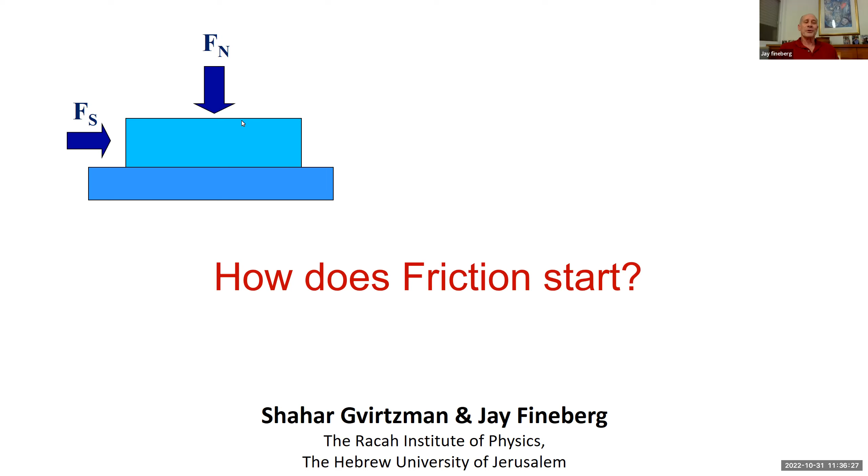And the person that actually did all the work is my graduate student, Shahar Gvirtzman. So anyone that's heard me talk about this stuff in the past few years has seen the same picture, but it's two blocks pushing against one another, and we're interested in this problem of an earthquake. But what we're really studying is this problem: how the interface that separates two elastic, rather smooth but still rough blocks, how it separates, how we break the contacts along this interface.

Over the past few years, we've done a bit of work showing that, at least in our experiments, the process of breaking this plane of contacts is by way of cracks. So you have ruptures or earthquake-like things that are moving in either direction, and as they move, they break the contacts until they finally break the whole line of contacts, and we get macroscopic motion.

So we know a lot about cracks, and our group, as well as quite a few others now, have seen such things. So now we're switching gears and asking about how the cracks form in the first place, and that's the nucleation problem. We'll be looking at how we start the initial cracks that then propagate and have earthquake-like behavior. See, I'm trying to be very politically correct here, Chris.

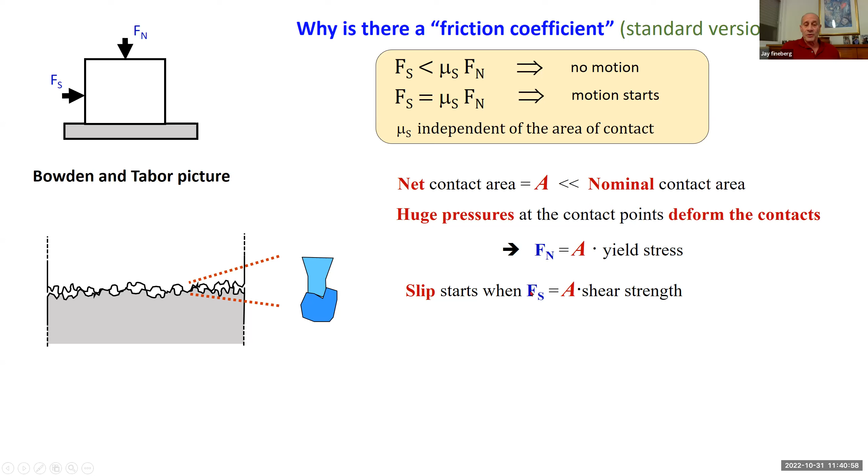Slip starts when the shear force equals the real area of contact times the shear strength. Putting these together, we get the static friction coefficient, and an explanation for why it's roughly order 1, because it's basically the shear strength divided by the yield strength of the material. Now, I don't have a problem with this.

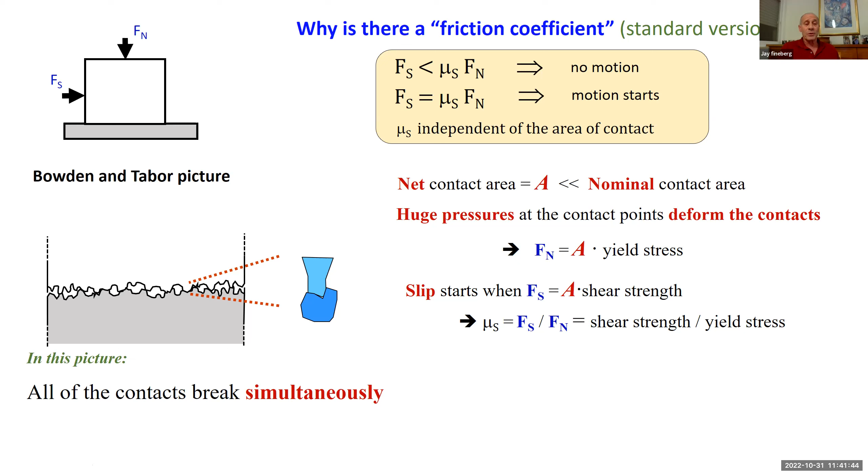In fact, I don't have a problem with anything here except how this contact area breaks. This picture tacitly assumes all the contacts are broken exactly at the same time, simultaneously. But that's not really how things break. In general, materials break because cracks propagate through them, so the fracture process doesn't break all these contacts at once, but sends an earthquake-like front through the material, and that's responsible for breaking it.

This has a lot of ramifications on the friction coefficient, on the whole friction process. As we'll show, one result is that the static friction coefficient of any given material isn't a characteristic property of the material, but depends on the small details of how these materials are placed together.

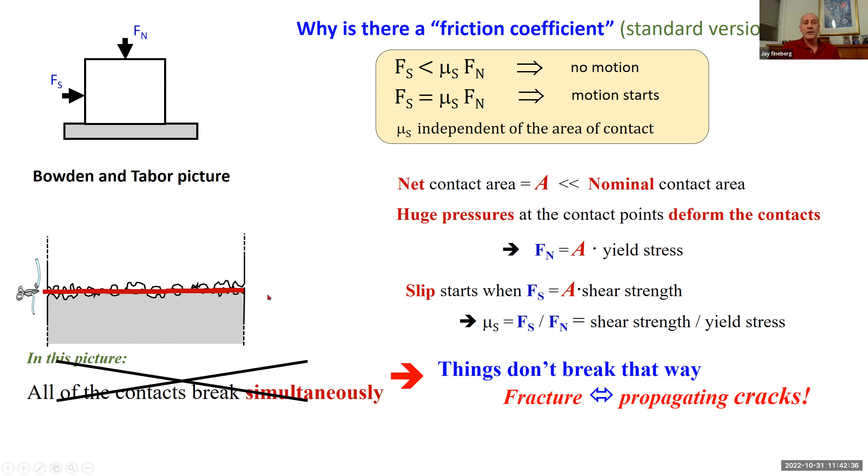So the onset of friction in this picture is basically the question of how, when, or why cracks propagate. Things break because cracks propagate through them. That's a general statement, and the reason is—I apologize if I'm repeating stuff you all know—any crack, however small, will focus stress at its tip.

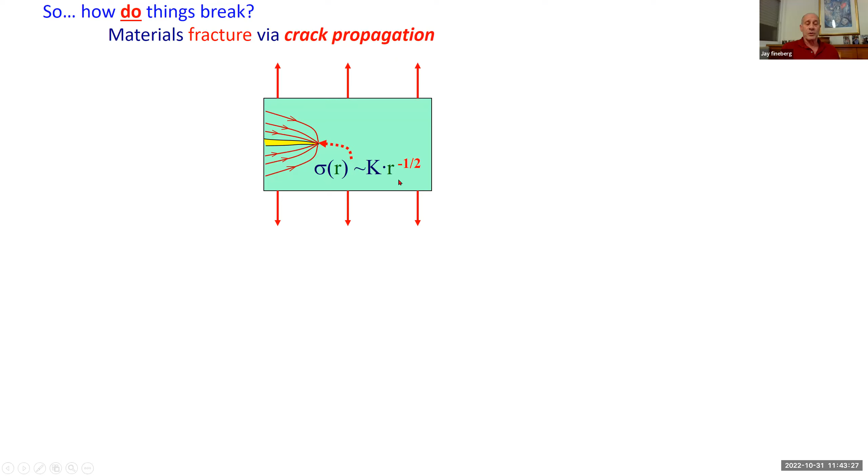That stress approaches a mathematical singularity. The stress field at the tip of a crack—here I'm showing tensile cracks, but it's the same for shear cracks—scales as 1 over the length r from the crack, to the power of 1/2. So as r goes to 0, the stresses become infinite. The claim, which I'll back up with data, is that the slip of interfaces, or frictional motion, is actually caused or mediated by shear cracks, called in the jargon mode 2 cracks.

Jay: can I ask a clarification? Sure. Which is the origin of the singularity? Is it because we are using elasticity everywhere except at the tip? Is the singularity a real physical feature, or a feature derived from our assumptions?

It's a mathematical feature if you assume elasticity everywhere and a stress-free back of the crack where we relieve the stresses. In frictional cracks, we haven't relieved all the stresses—there's a residual stress in back of the crack. But if this residual stress is more or less constant, because we're looking at a linear system, we can subtract it away. So we're actually solving the same problem as for a stress-free crack in the back.

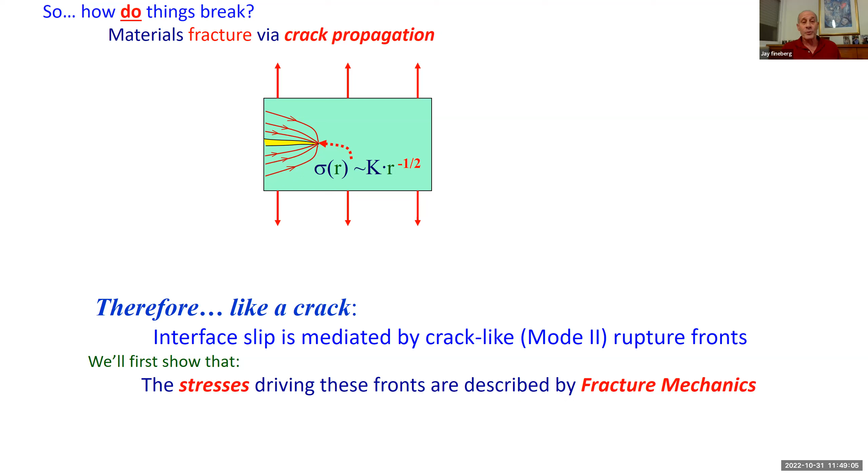Because often these questions are more important than what I wanted to get to in the first place. So anyway, the formalism of talking about what cracks do and how they do it is basically fracture mechanics. I'll show you that fracture mechanics works to explain quantitatively frictional cracks and describe their motion. But first I'd like to explain a little bit about our experiments. Elsa has probably told you about this, so I'm going to go through it quickly.

We mentioned that we're interested in the real area of contact along this spatially extended interface, and these are the dimensions of the experiments that I'll be talking about, more or less.

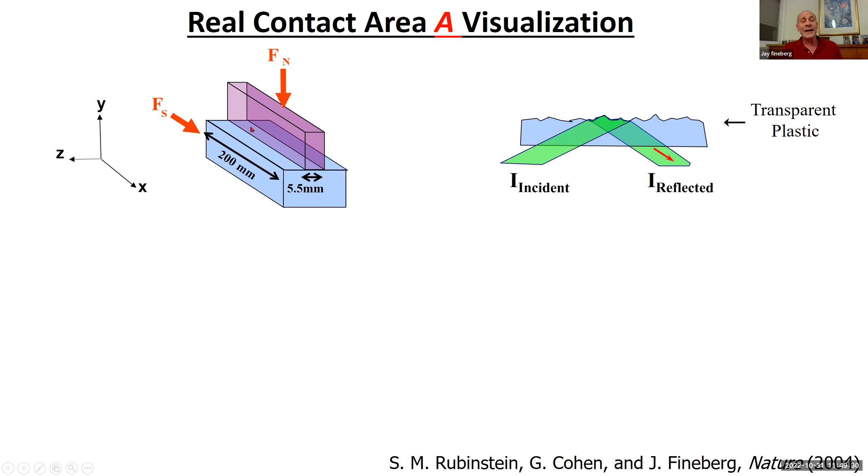We visualize the whole contacting surface at one time by shining a sheet of light at an angle beyond the critical angle for total internal reflection between the transparent material we're working with and any air trapped between asperities or between contacts. So anytime this light hits an air pocket, or not a contact, it's reflected away from the interface, and light only goes through at or very near the points of contact.

So if we look at the light that's transmitted, it's more or less proportional to the real area of contact along the interface. We're taking pictures of the interface at around 600,000 frames a second. So if our cracks are moving at order of 1,000 meters a second, every millimeter or so we're taking a snapshot, mapping the real area of contact along the entire interface in these experiments.

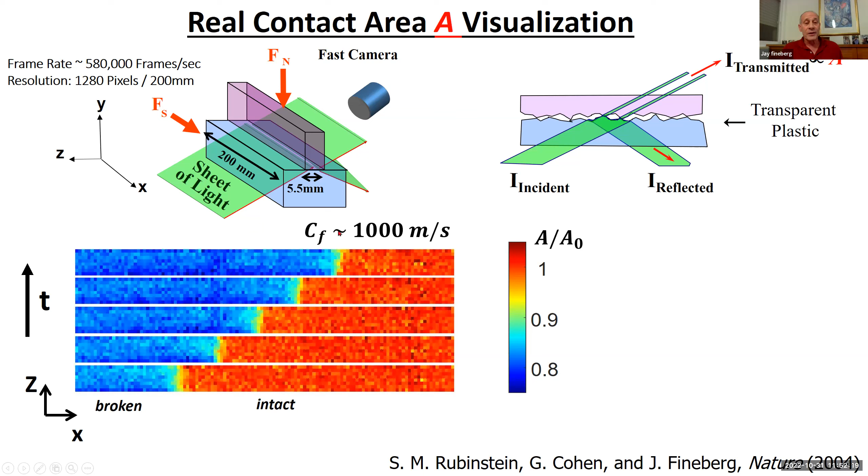For the beginning of the talk, I'll show you an integrated view — each of these is a 2-dimensional map at each point in time, but to simplify things, we're going to integrate across this thickness dimension, like so. I'll be showing you maps like this.

This ugly orange color is the initial contact area, already normalized to its initial value at some point in time, which we'll call 0. Time will usually be on the vertical axis, and the spatial coordinate will be on the horizontal axis. This is our front propagating through the material, and the higher the slope, the slower the front is going.

So this is a front that started at one of the edges of the system over here, and is propagating slowly, picking up speed until eventually it gets near the Rayleigh wave speed, which is the speed limit for standard shear cracks.

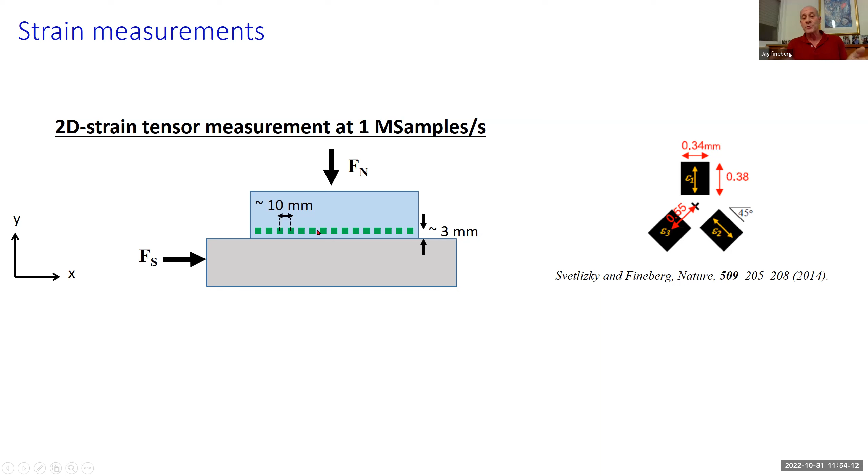We supplement these measurements of the real area of contact with strain measurements. We use very minute strain gauges - each green square is a strain gauge situated a few millimeters, about 3 millimeters, from the contact region. Each strain gauge is a rosette strain gauge, giving us the full strain tensor at each point. These are separated by about 10 millimeters, and we measure the strains at 1 megasample a second, a million times a second, for each coordinate separately, which makes for a lot of wires in this experiment. As the fracture or rupture moves across the sample, at each point we're getting the strain measurements that the rupture is causing.

Quick question - does the strain tensor setup interfere with the light transmission or reflection?

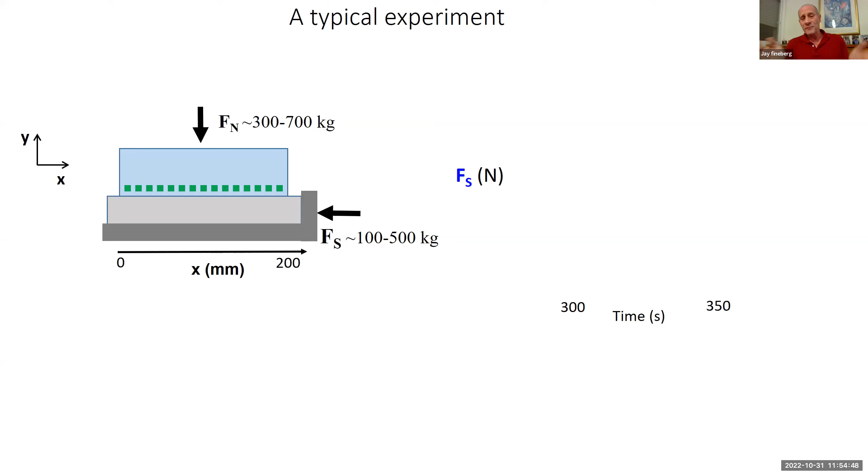No, that's why we have it a few millimeters above the interface. The light is moving underneath. If the side where the strain gauge is situated is on the incident side, the light goes underneath them, and because they're separated by a few millimeters, the light actually comes out underneath them if we flip the sample around. So we're not seeing the strain gauges in the light measurements.

Thank you. Okay, this is a typical stick-slip measurement, shown at a scale of seconds. We're pushing at the shear force, we get to some peak, it then goes down, then we continue to push at a constant velocity. So we get the stick-slip motion that you're all familiar with.

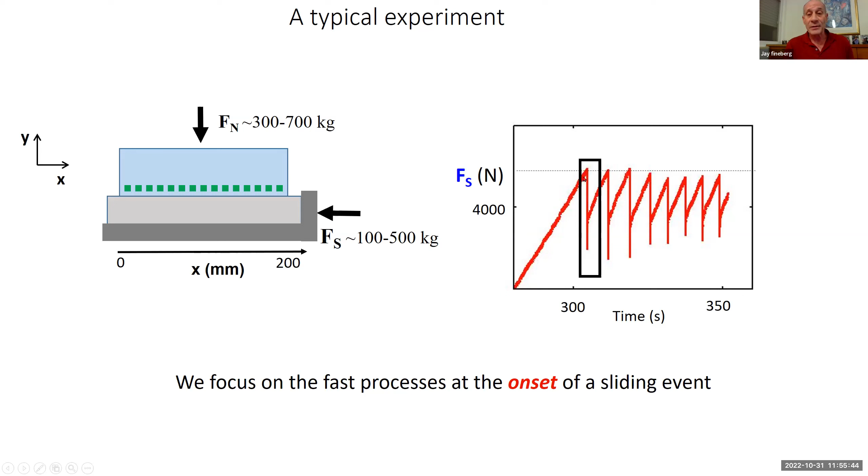Now what we're interested in is actually the motion around one of these stick-slip points, the point where the interface breaks. So we're going to focus on the fast processes occurring around each one of these peaks.

This is a real experiment, showing the real area of contact at second resolution. There's 7 seconds between one stick-slip event and the next - this is a rupture front, and the next one is the next rupture front. If we zoom in on each one of these, at the microsecond time scale, we see the rupture fronts that I was showing you before.

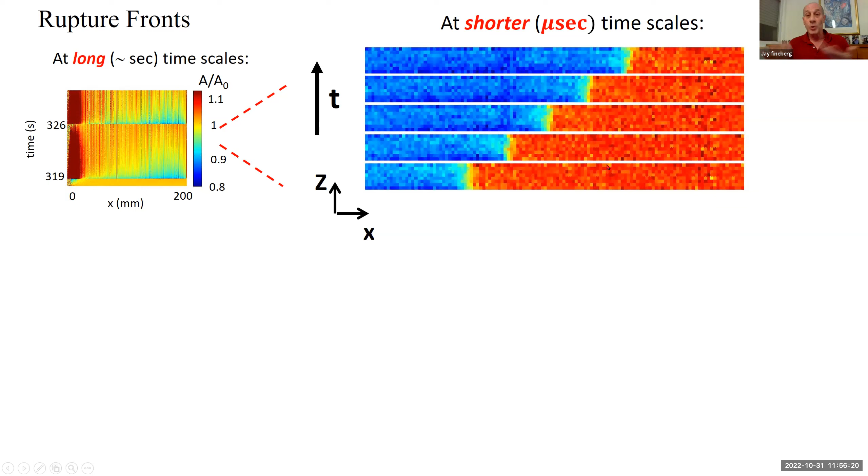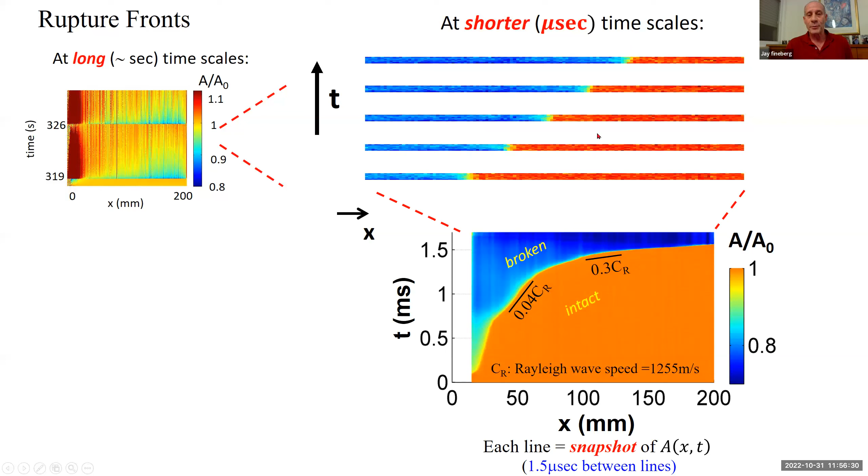If we zoom in around each one of these areas, we see earthquakes, or lab quakes, as they propagate. Again, we're integrating along the thickness of the sample, so we'll be looking at maps like I showed you a minute ago - each horizontal line is basically a snapshot of the integrated real area of contact across the interface. As long as an earthquake is on one strand or something, we're looking at something that's pretty analogous to real earthquakes.

Jay, can I ask a question? In this picture, when you measure the propagation of the rupture front, when you say crack-like, is it because the slip velocity has a sort of Kostrov type function?

No, I'll show you in a second, but you can describe all of these ruptures as shear cracks, identically as shear cracks.

So here you don't have any cohesive zone? We do have a cohesive zone - we actually measure it, but not in this talk. We're actually measuring different cohesive zones in different types of materials right now. My postdoc is doing it, I don't do any work, I just watch them work. But we can look at the structure of the cohesive zone, though I won't be talking about that today.

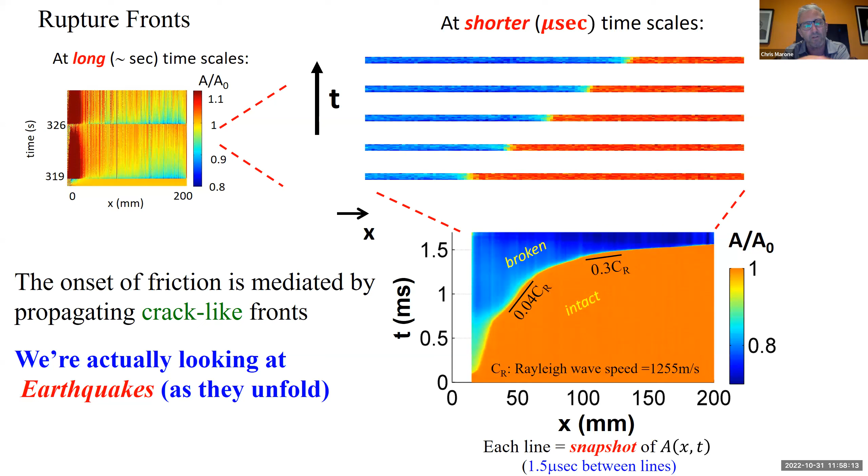Thanks. One more quick question while you're on this slide - this picture on the top left here, what happens before 319? Is that the first stick-slip event, and is that why there's a longer period where it's really stuck?

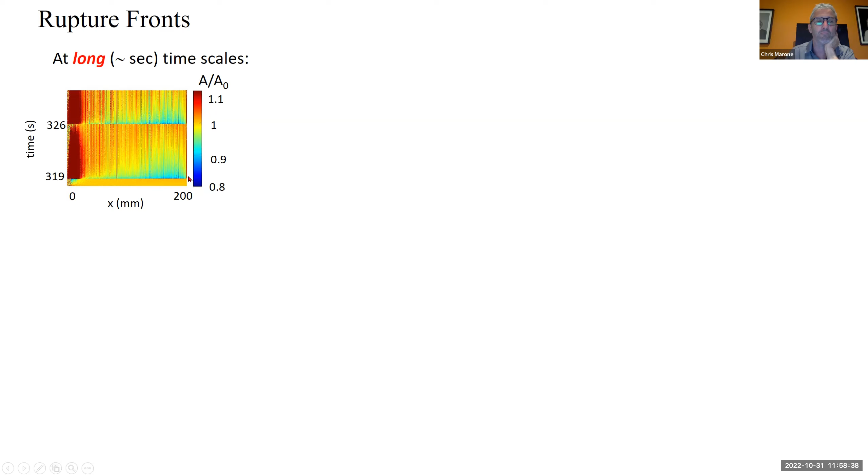Right, that is exactly this period - we're loading. We normalize the data to around this point, and that's why it's this homogeneous shade of orange, because nothing happened. Now we can actually see aging here, if you like. We broke this contact area - it's now blue, reduced by 20-30% or so. And within a few seconds, it already approaches its value at the beginning of the experiment. And then it breaks again.

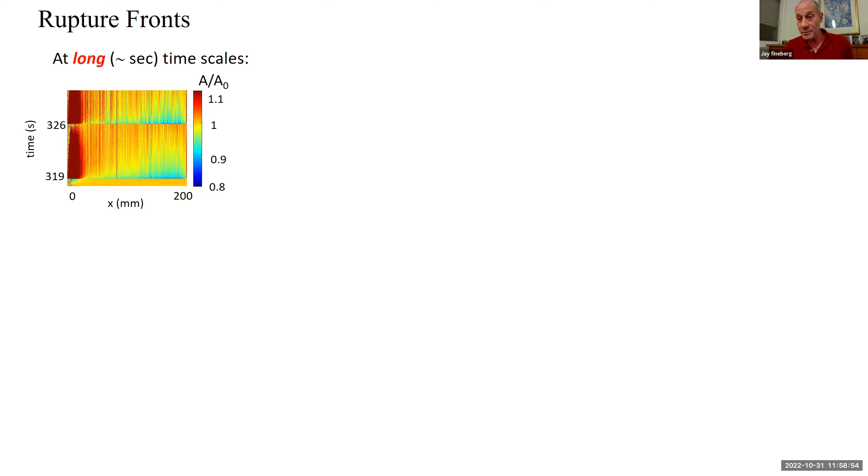Yeah, cool. Okay, thank you for these questions. This is great. Thank you.

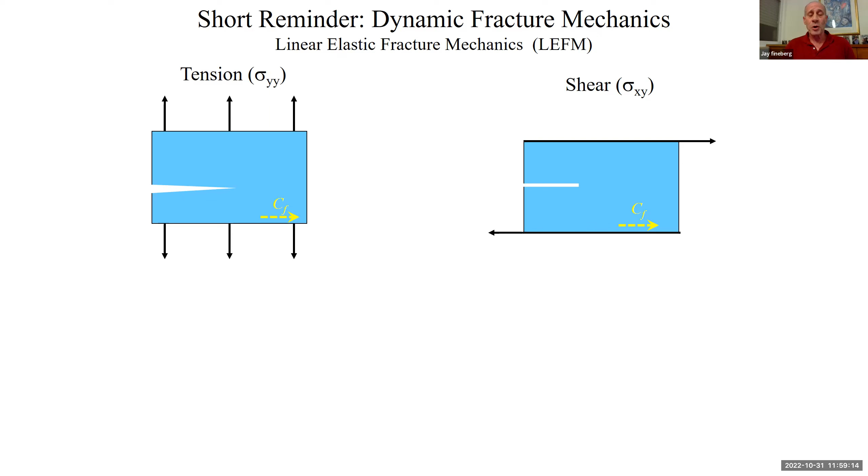Okay, so as Massimo hinted, we're going to explain all of this stuff using fracture mechanics. So for those of us who aren't experts in fracture mechanics, I'll tell you all that you need to know in order to understand this talk.

First of all, assuming we have a linear elastic material, both in tension or in shear, the stress field at the tip of a crack scales as K, which in the jargon is called a stress intensity factor, divided by the square root of the distance r from the tip itself, so that the stresses are singular. All the different components are all singular here.

Cracks move not because the stresses become infinite, but because the energy flowing into the tip of the crack is exactly enough to balance the dissipation caused by breaking a unit area of material, and that's called the fracture energy. So even if a crack is stationary, we still have this putatively stationary singularity, but it doesn't transport enough energy to break bonds.

So actually the balance of energy is the criterion for getting a crack to move. Once the energy flux into the tip of the crack goes beyond what we need to break things, then cracks start to propagate, and earthquakes as well.

And the earthquakes that I'm talking about have a speed limit. These are the sub-Rayleigh earthquakes, if you want, or fractures. The speed limit for these is the Rayleigh wave speed, or the speed at which a disturbance moves along a free surface. Shear cracks can also go faster than that, but that's not relevant to what I'll be talking about today.

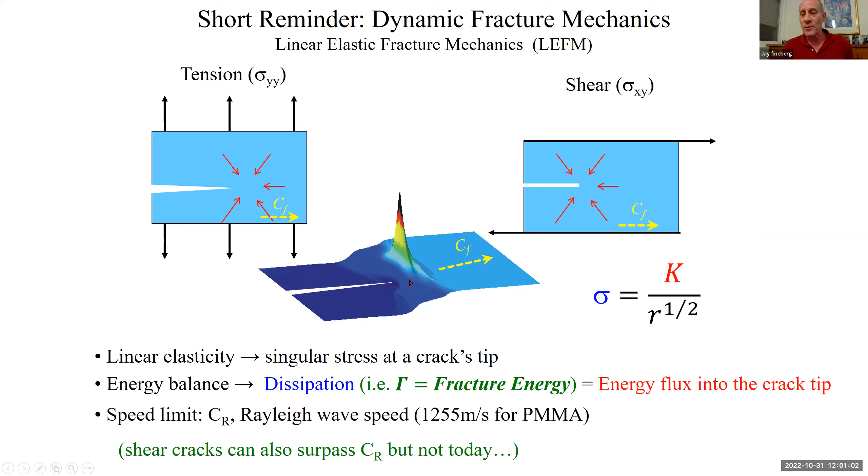The wiggly function is a universal function predicted by fracture mechanics that goes along with this singularity. Now, I have a problem here if I'm just curve fitting, because I have one free parameter and a tensor which has three different components, and now it's time to put my money where my mouth is.

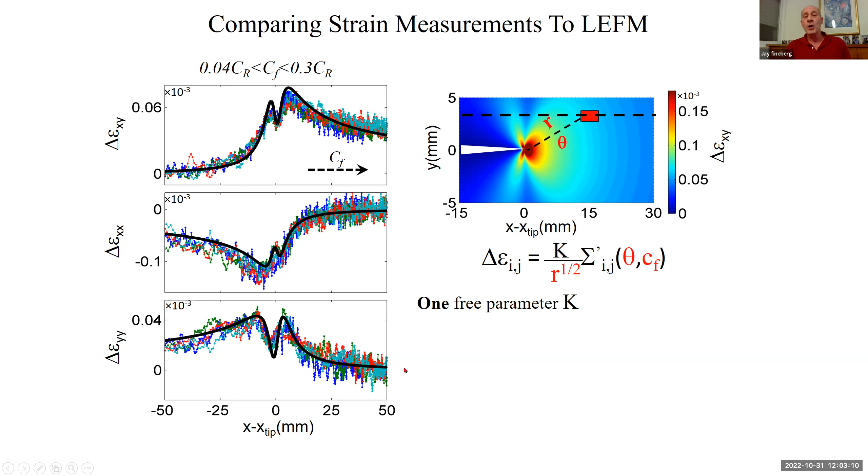This is what Ilya Svetlizky, my former graduate student, showed. With one free parameter, we fit all of the tensor components. This does a phenomenal job with only one free parameter, the stress intensity factor, of fitting all of the strains or stresses that we measure.

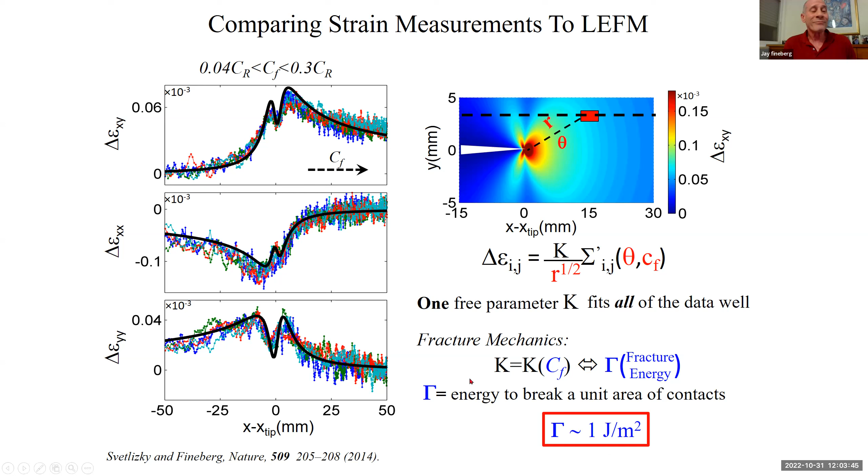Now, the stress intensity factor can be translated to the fracture energy using the formalism of fracture mechanics. So by measuring this K and knowing the velocity, because we're watching the crack as it's moving, we basically measure the fracture energy, or the energy to create a unit extension of this rupture. In these experiments, the fracture energy is actually proportional to the normal stress we're applying, and it's 1 joule per meter squared.

I'd now like to talk about the equation of motion for frictional ruptures. So remember, I talked to you about energy balance. The energy flux going into the singularity has to equal the dissipated energy, or the fracture energy. And this is kind of a cartoon of fracture mechanics.

This is what it's saying. So the energy flux, which we'll call G, has two pieces to it. Don't worry if you're not following the details, because I don't care right now. I'm just showing you that we can do this.

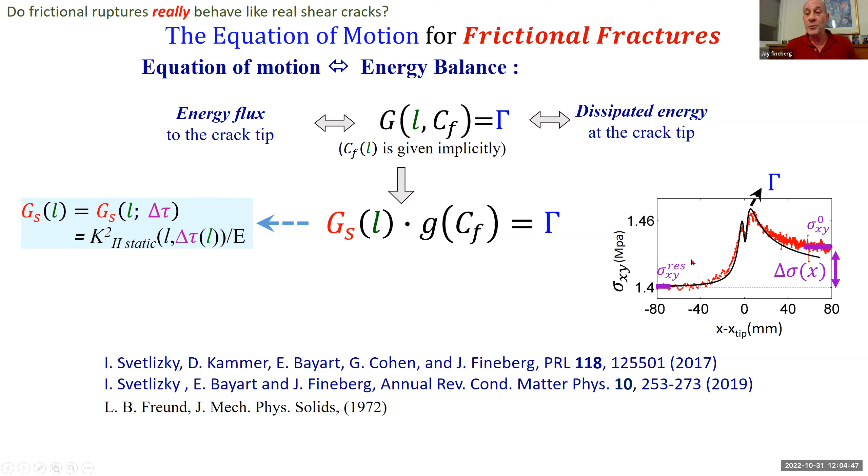This is separable under certain circumstances, and this static stress intensity factor, as Elsa Bayart told you a few weeks ago, can actually be explicitly calculated by the stresses in front of the crack. The fracture energy we can measure by fitting any one of these stress curves to LEFM, so this is a measure of the fracture energy. And this, little g, is a universal dynamic function, which when we invert it is actually the equation of motion for an earthquake.

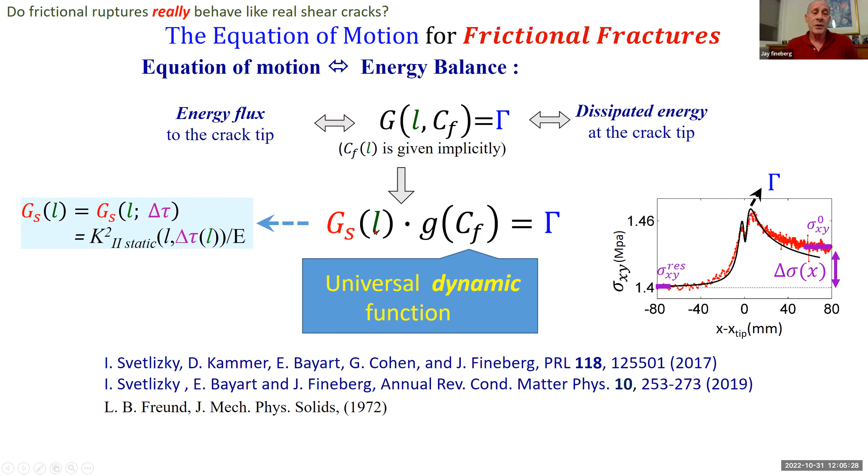If I want to, CF is the instantaneous velocity of the crack. I know what this is for every crack length L. I know what this is because I've measured it. If I put these two together, I can get a prediction for how the velocity of the rupture changes, for example, with the length of the crack. And I can also get a prediction for crack arrest.

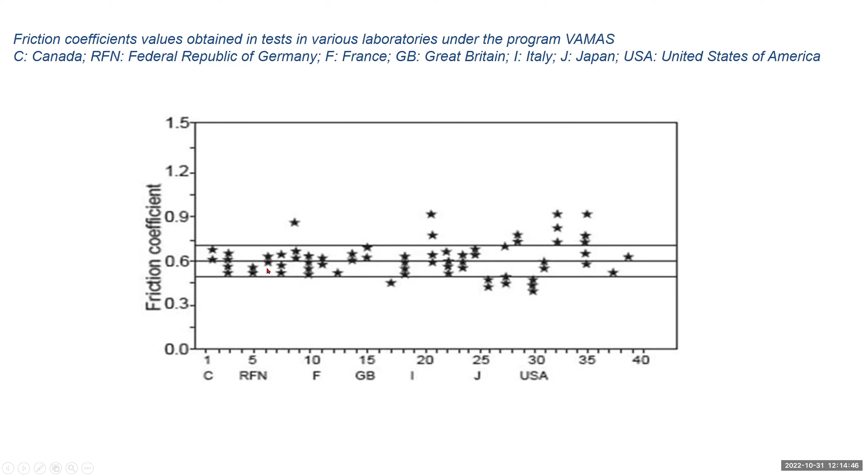I have a question on this graph and the previous one—is the maximum value here, like 0.75 or 0.90, a physical value? In a sense, it would be a shear strength. The 0.75 maybe approaches... it's a limiting value from below.

Whether we get to 1—we've actually seen shear strength friction coefficients that have approached 2 in some of our experiments. There we get super shear. But it's always going to be on the order of 1 or so in our experiment for the maximum shear stress or shear strength.

But is this parameter a material property or not, for you? Not really. Once we start to measure the cohesive zone, which we're doing now, I might be able to tell you for the materials we're measuring what the maximal strength is. But these experiments are just a sample, and I don't know what the limit really is. I can estimate it, or guesstimate it, using scaling arguments, but there's nothing special about this value or that value per se.

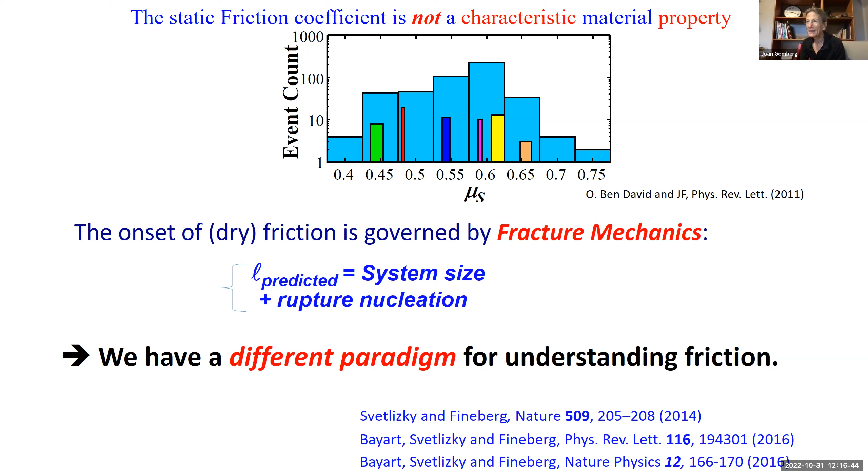Okay, this is on the previous slide where you look at the velocities. So if I understood this correctly, which is questionable, you suggested that you can explain essentially slow or fast earthquakes, all with fracture mechanics. That's correct. Now, I'm not sure all slow earthquakes.

Cascadia, for example, I don't know of this fault, but the statement is, in my experiments where I have a single fault, if I'm very close to the limiting value, if I have enough energy to barely go over the fracture energy, I'm going to get very slow propagation. That's the statement. Now, whether these are silent or slow earthquakes in nature, I don't know.

But it suggests, does it suggest that it's possible that, so people have suggested there's fundamentally two different processes, slow and fast earthquakes. This would suggest otherwise, potentially. This would say that you could explain even very slow processes in a single framework.

But I'll be showing you in a second about nucleation, where I see very, very slow fronts that are ruptures moving that can't be explained using typical fracture mechanics. So it doesn't necessarily explain everything, but I think the flip side is correct: every slow earthquake that you see is not necessarily something different than fracture mechanics.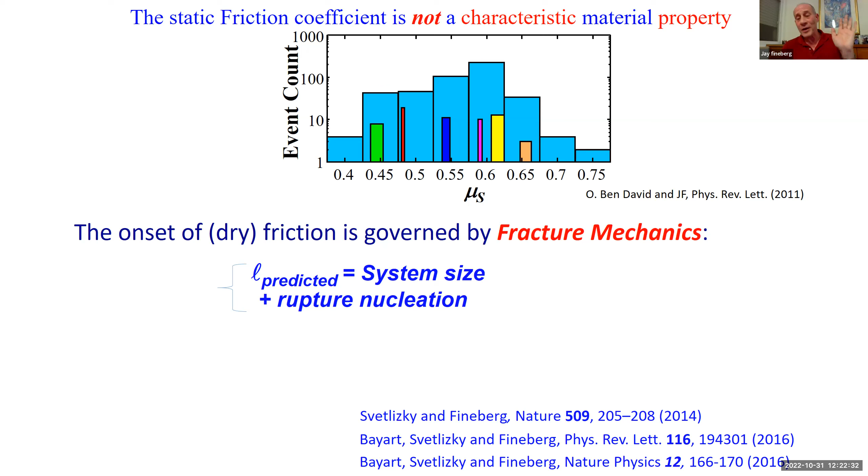I'm throwing it all under one rug, but given enough time I can explain what I mean. There is no friction law assumed here. All of this stuff assumes no friction law at all. We're subtracting away the residual stresses at the tail of the crack, so we're looking at the stress drop at the tip of the crack. That's why it's delta tau and not tau. Beyond that, there's only one parameter in this description, it's the fracture energy. And with that one parameter, I can explain all of these things.

So there's no friction. Now, the friction law could come into describing what the residual stress looks like, but it's very well behaved relative to the initial stress that we're seeing. Is that clear? Okay, thank you.

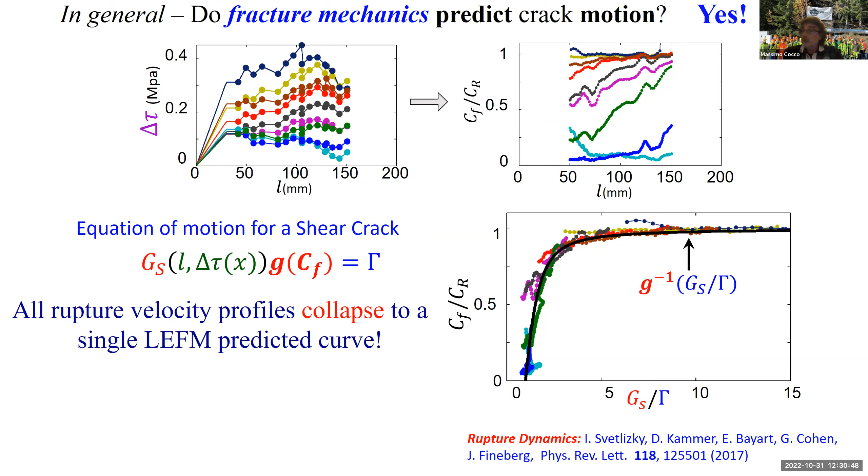Okay, no, I agree and disagree at the same time. First of all, this picture is without any cohesive zone at all. All of the dissipation is at the crack tip. And in that sense, we don't need to worry about the stresses in the cohesive zone, because all of fracture mechanics, or this version of fracture mechanics, assumes a point-like or small-scale yielding. So there is no effect of the cohesive zone because the cohesive zone in this picture doesn't exist.

Now, in back of the crack, we can actually measure a cohesive zone. We can measure the slip. We do, we even published something at some stage. I can talk about it, but we get a parabolic slip profile behind the crack, except very near the tip. So we do see the cohesive zone.

Now, within the cohesive zone, the material can influence the crack ahead of it, for sure. So I guess the question is, how small is the cohesive zone? And what is the region here where this singularity is blunted, is regularized? So I think that's what you're saying, no?

Yeah, but to me this is a strong limitation to extrapolate. So everything you said is perfectly coherent in terms of linear elastic fracture mechanics and also interpreting the propagation of frictional instabilities as in your experiments. However, the way in which earthquakes radiate seismic waves is not only through acceleration, but it is also determined by how steep the stress release is with respect to the unloading curve. And this depends on the cohesive zone.

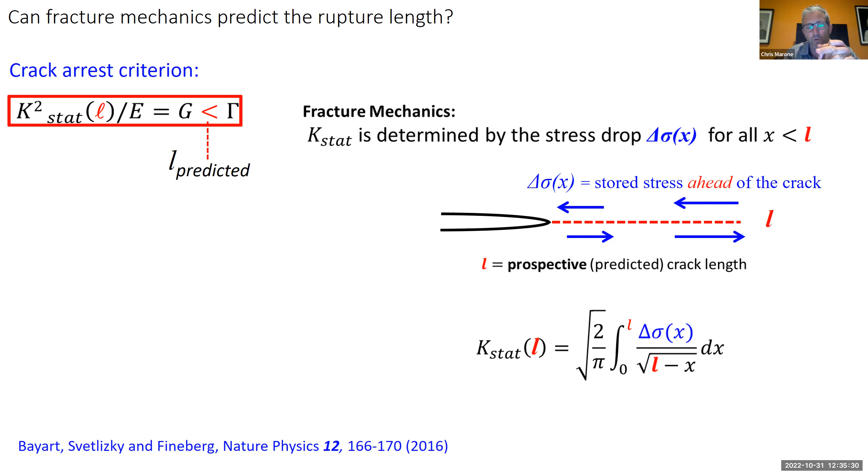To continue the discussion, you made the statement a few minutes ago that you wouldn't expect any radiated energy, but you showed us a plot of a crack moving along at the Rayleigh wave speed, at least on one end. So all of the points out in front of that crack have to accelerate dramatically, and those points are going to radiate energy when they accelerate, right?

That's already included in fracture mechanics. That's not new, that's a smooth field basically, it's part of the solution. But physically, when the crack propagates, there are points that accelerate from nothing to a slip velocity that goes along with the Rayleigh wave speed. So there's nothing smooth about that, even in your experiments, right? There's going to be radiated energy. It goes into kinetic energy that's radiated out, but that kinetic energy field is very smooth.

So I guess my statement is, if you see rapid fluctuations in the seismic energy, it's not because of fracture mechanics. Well, it's not. That would come from Massimo's point, that if the fracture energy is fluctuating, then you're going to have this balance all the time. It's all the time having to slow down and speed up the crack in order to satisfy this equality.

I agree with you, but I'm not talking about the variations, I'm just talking about the energy that's going to be associated with accelerating those points. Now, it could just be a constant energy. Maybe that's... No, it's very smooth, is all I'm saying.

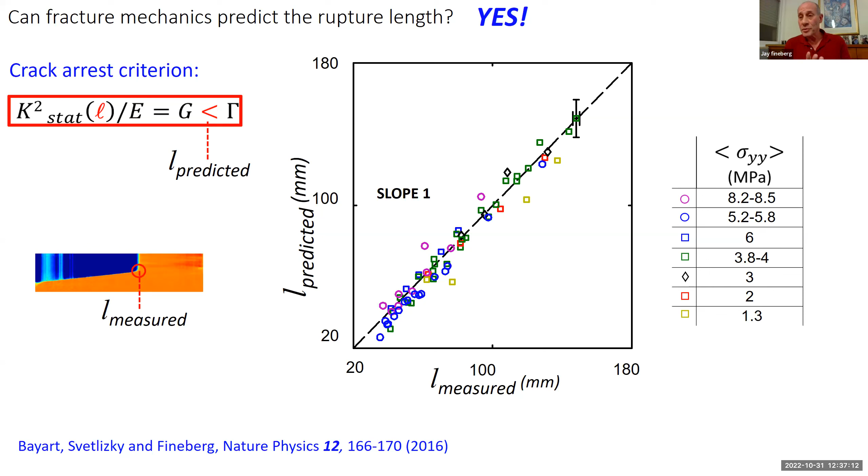You will get acceleration because the cracks here, I guess, where is it? These are accelerating. So you will get energy, that's the energy density, the kinetic energy, the energy causing the separation of the two faces of the crack. That's kinetic energy in the bulk. And that's like a global thing, it's not just the faces have to move, but everything around it has to move to accommodate that. Right, and that's the kinetic energy field that a crack is giving rise to. But it's very smooth because it's a kind of global thing.

So yes, the point right ahead of the crack goes from 0 to 100 instantaneously. But that's not causing the radiation, the radiation is caused by the whole crack itself, moving stuff around in order to accommodate that. Okay, so it's a little tricky.

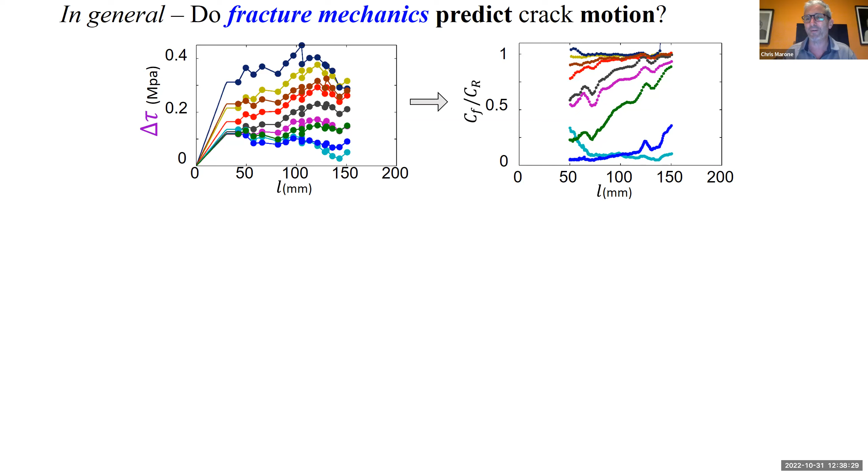I don't think we disagree. I will say that you should stop us, you've been very successful at getting us to participate. If 20 minutes is enough, then great, and otherwise, tell us to shut up.

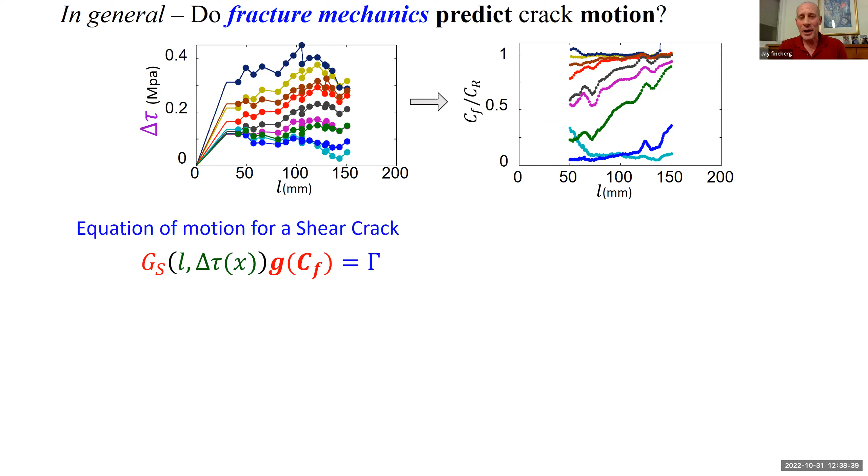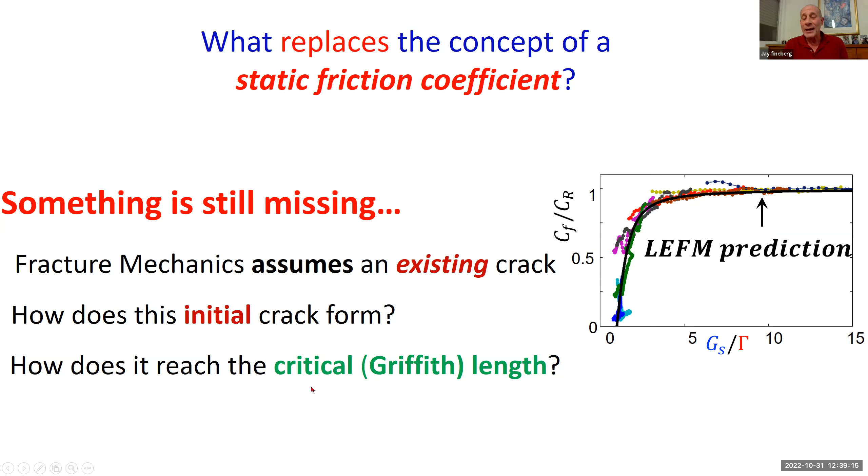Okay, I am going to get to nucleation right now. Nucleation of the crack. Here's the question we're trying to answer: something is missing here. We have this wonderful description, fracture mechanics, but in order for fracture mechanics to describe a crack's motion, we need a crack in the first place. No crack, no fracture mechanics. So the concept of nucleation is asking, how do we get the initial crack? How does this initial crack form, and how does it reach a critical length where the crack takes off? The Griffith length, for the expert.

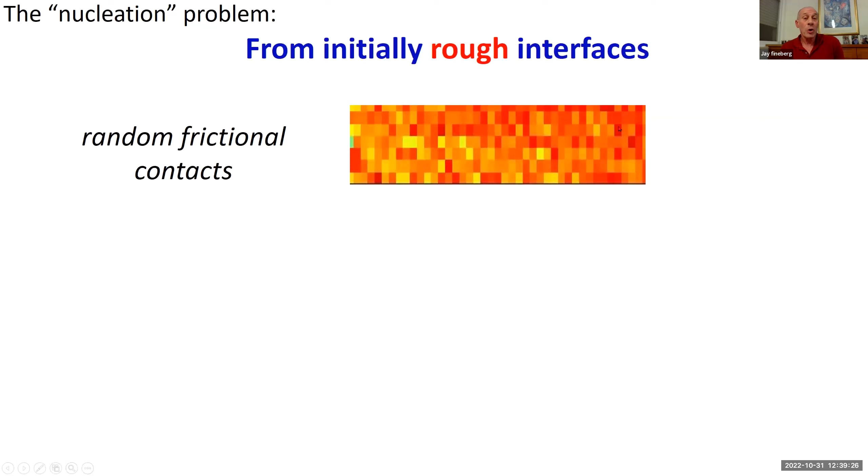So pictorially, we start all of our experiments with random contacts, and somehow, after nucleation, we get a front. So how do we start? What lights the match to start the forest fire, if this is the forest fire? That's the question we'll be looking at in the next few minutes.

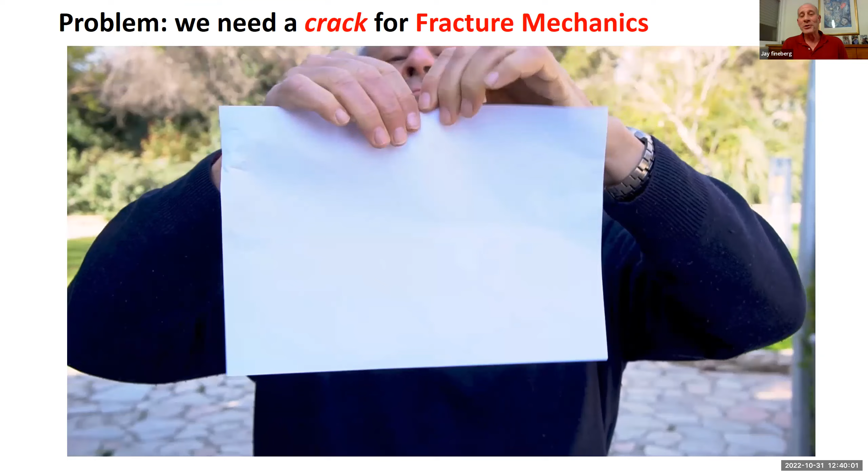And here, to show this more graphically, I imported a Hollywood actor, so bear with me. This is an explanation of what I just said: put a little crack in. But what creates this initial crack? I tried to get Robert Redford, but he was busy. So this is what we're going to talk about. Now, what's the experimental problem in doing these experiments?

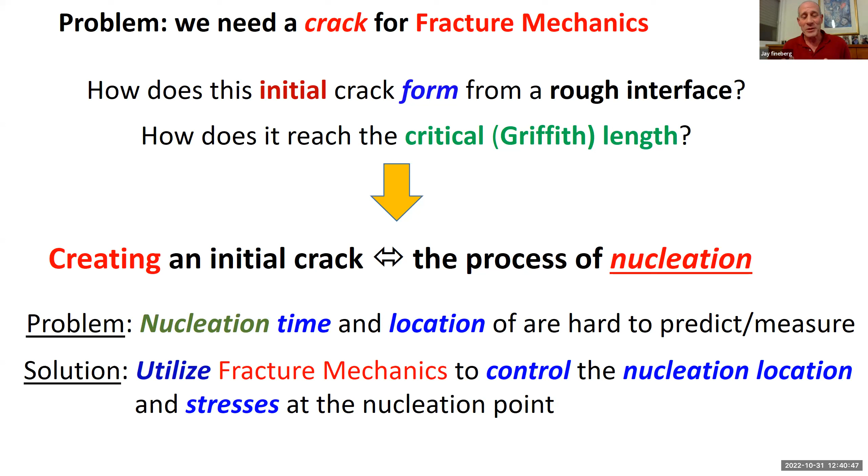This is because in general, we can't predict where and when nucleation is going to take place, even in the cleanest experiments we can make, certainly in our laboratory. So our solution is to utilize fracture mechanics to control where and when nucleation is going to take place. Actually, I'm rewriting history because we discovered this totally by accident, of course.

So what we're going to do is study nucleation at this point along the interface. We put a speed bump here by locally increasing the fracture energy. We generate a usual rupture that starts somewhere here and barrels along. When it hits this speed bump, if the energy flow into it is smaller than the level of the fracture energy, it's going to stop on its nose. We're going to do that in a second.

And then what do we get out of this? We get a very well-defined stress profile, with a stress singularity where it stopped. If we nucleate somewhere along here, on the other side of the speed bump, we know exactly what the stresses are at which it causes. So we know it's going to nucleate here eventually, and when it does, we know what the stress level is. We're going to use that to describe the nucleation process.

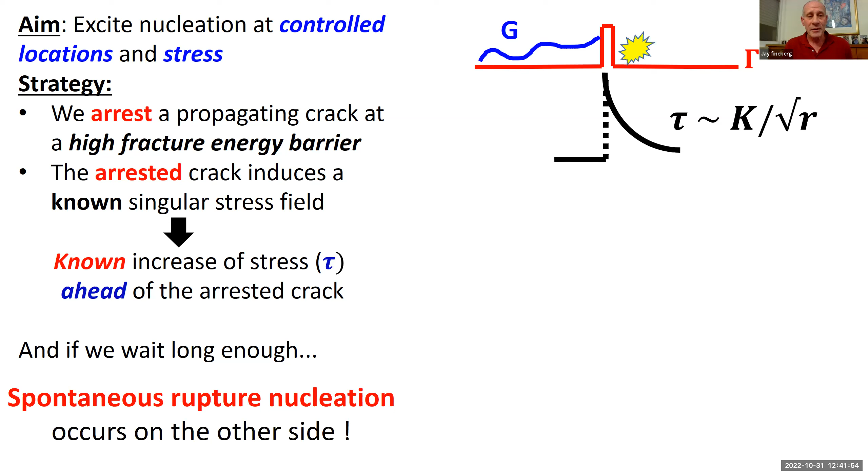So this is a picture of what we actually see. Here's an arrested crack — a blow up of 40 millimeters of a 200 millimeter region. So we have a crack barreling along at probably a large percentage of the Rayleigh wave speed. It hits this speed bump and it stops on its nose.

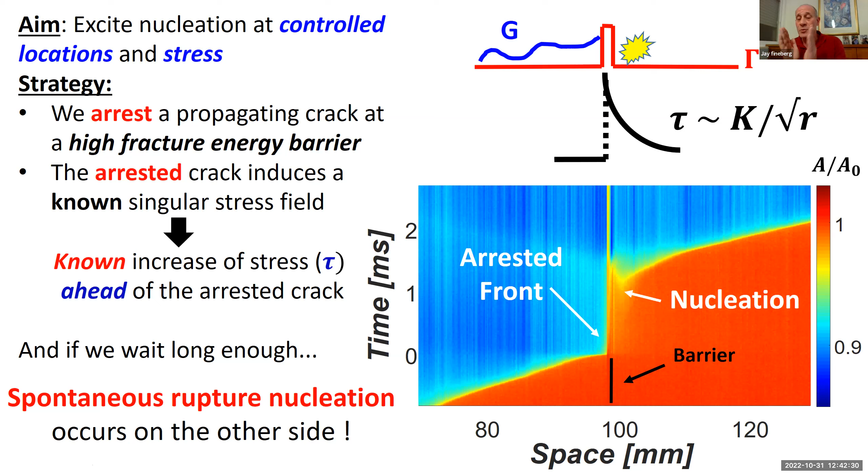And then we wait. This is our barrier here, where the speed bump is. On the other side, if we wait long enough, we see slow nucleation takes place. We have all the time in the world, since we know where it is, to study it. So that's what we're going to be talking about.

Now you might ask, okay, what do we use to make the speed bumps? A magic marker. This is a picture of a transparency pen, and we make a mark a millimeter wide along one of the frictional interfaces. The reason we did this initially is that we wanted to study the slip along the interface.

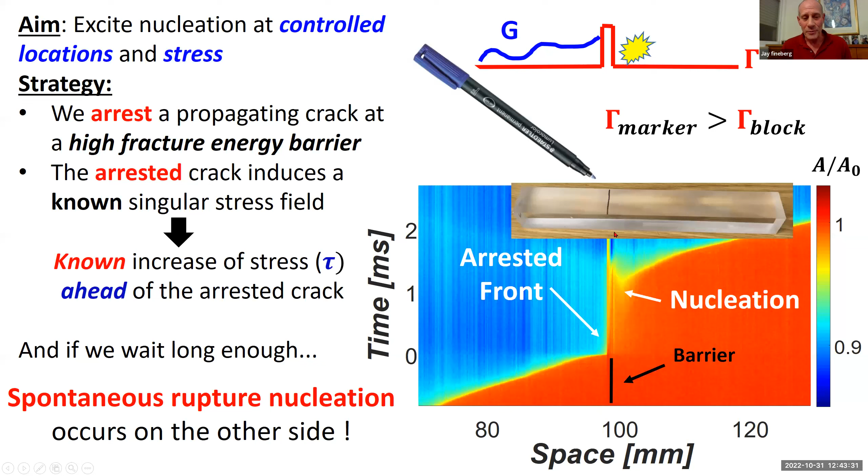So we're going to make an array of these marks and watch what they do. But when we started to do these experiments, we noticed that cracks would barrel along, and just when we wanted to see the motion, it would stop on its nose — until we figured out that what we were doing with the magic marker is increasing the fracture energy. We can measure this effect: we're actually increasing the fracture energy by a factor of about 5 with your standard transparency marker. So now we're going to use this to study the nucleation process.

But we're not going to use, again, fracture mechanics in order to describe exactly what's going on in this process. So fracture mechanics isn't involved in this process except to set the stage to do the experiments. I'll show you what I mean by that.

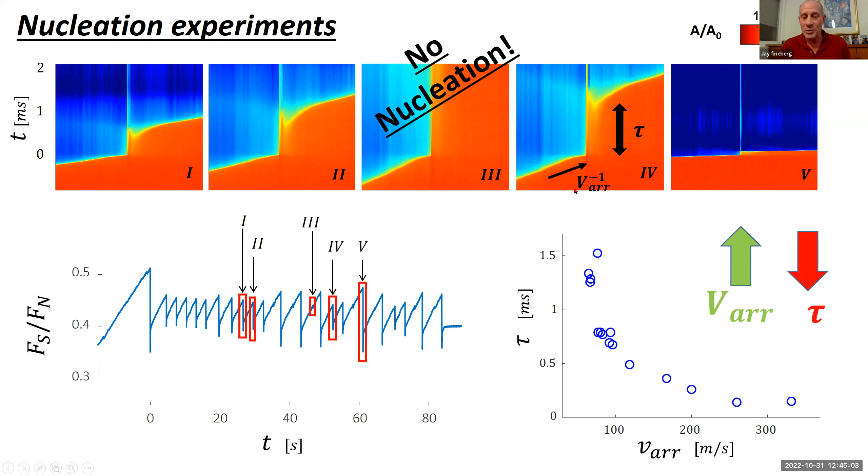We also have cases where we're barreling along, we stop, and then we could wait forever — forever being seconds in our experiment — and no nucleation takes place. You can see here that the waiting time we need for nucleation is asymptotically going to infinity, if you like, at least experimental infinity.

Now, I'm going to go through this fast, so just bear with me. When this crack stops, it actually broadcasts a shear wave ahead of it. It changes very slightly — this is a blow up of that, the fracture, the contact area. This change is on the level of about 1 or 2 percent.

That's actually the trigger for the nucleation. The idea is that we're sending a high amplitude wave ahead of the arrested crack, and that's breaking the weakest points of contact. So the weak guys are being broken. That's the only reason we can see this front, and it kind of disappears as it goes within a few millimeters - we can't see it anymore. But that's the match that's gonna start the nucleation process.

So if we look at the change in the contact area, the whole scale is 4% change, so we're changing by 1 or 2% here. We'll call this the damage zone, if you like, and give it a Greek letter Xi in order to make it look scientific.

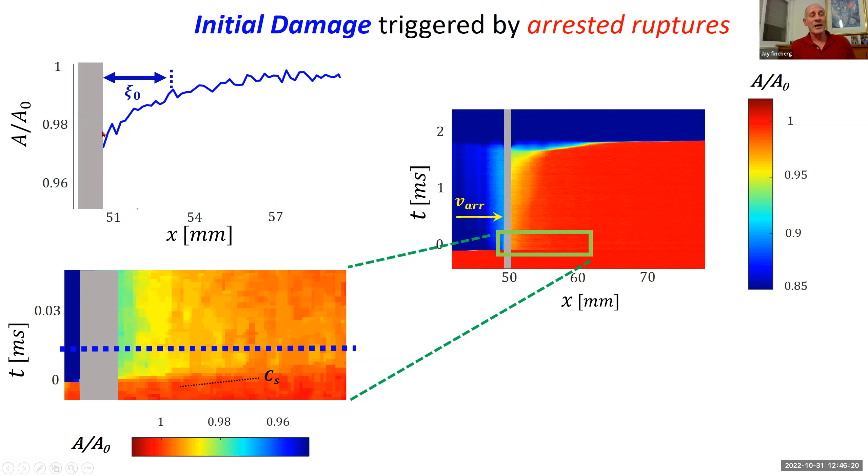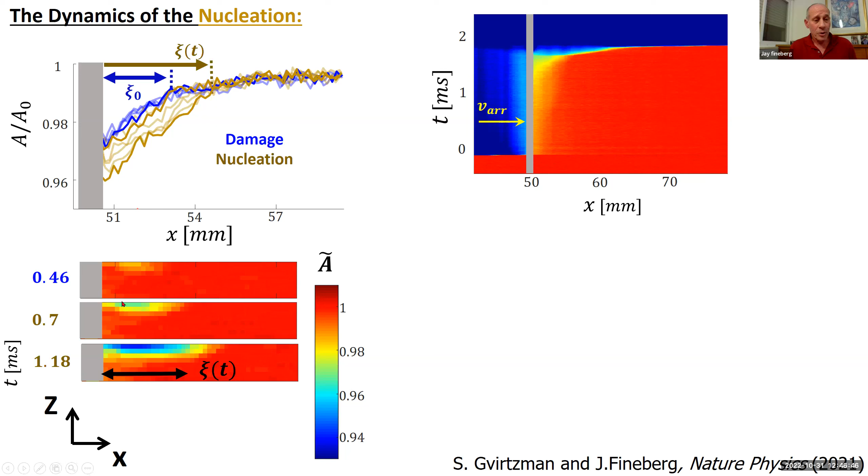Now we watch as Xi unfolds - this is the initial damage, and now we're looking as a function of time. Every once in a while I'm going to show you a snapshot of the 2D fracture area. In this case we nucleated near the side - this gray thing is the barrier - and now it's going to propagate. You can see it gets larger and the center is moving. It's going to propagate until it gets long enough in this red to actually cause fast rupture, and then it just goes like a bat out of hell.

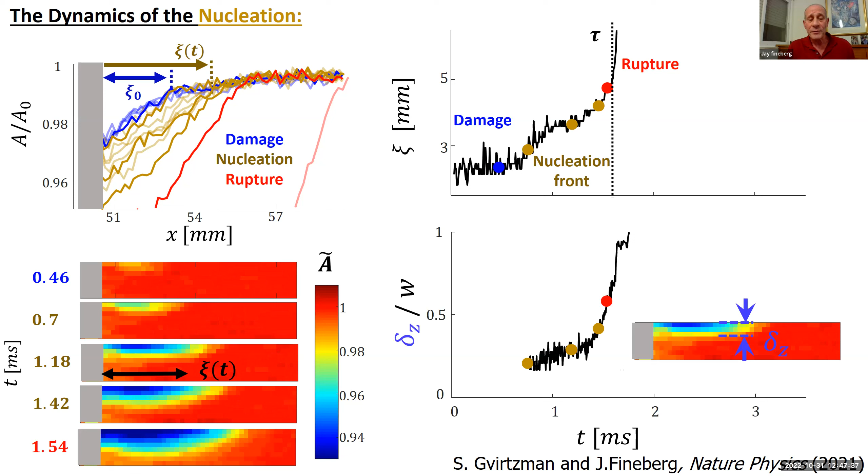Now the nucleation front, this is both in X and in Z, but they follow each other, so I'm only going to talk about the nucleation dynamics in X. These are really, really slow - moving along in our experiments at the meter per second region. This is not the slip velocity, this is the rupture velocity - 3 orders of magnitude smaller than what's going to develop eventually when the crack starts to rupture dynamically. So these are aseismic nucleation patches that expand, and they expand at nearly a constant velocity until they reach a critical length, and then earthquakes explode. These also have a time scale, the same time scale I told you about - it's the start of the rapid rupture.

So what determines the time scale - I'm going to go through this fast, but hopefully this is clear - is the stress at the point of nucleation.

What was that, Chris? Okay, Jean-François, you just unmute. Yeah, thanks, Jay. Just a quick question - how do you determine Xi, this length scale? Because you have to set a threshold, right? And depending on the threshold you choose, how sensitive is the result you get?

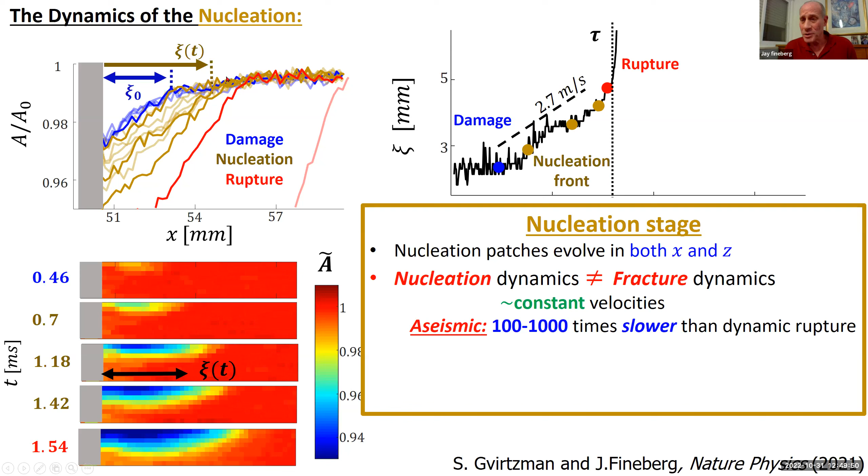Basically, it has this form - over here, these fluctuations are our noise level in the system, and these are significantly above the noise level. So the fact that we can... I forget where this thing is.

Okay, well we can see this fast rupture taking place - it's not a rupture, it's like a high amplitude shear wave. That's in this 0.5% thing, so yeah, it's pretty well defined. We can change the threshold and it doesn't change really anything - not the dynamics of what we're looking at.

Thanks. So, okay, now we can use the magic of fracture mechanics to convert the arrest velocity of the initial crack to the stress of the arrested crack. So forget the details, but using the formalism of fracture mechanics, we get this mysterious K.

We define sigma induced, the induced stress at the point of nucleation. R star is the point where the nucleation started. Using this, we know precisely what the stress is at the nucleation point.

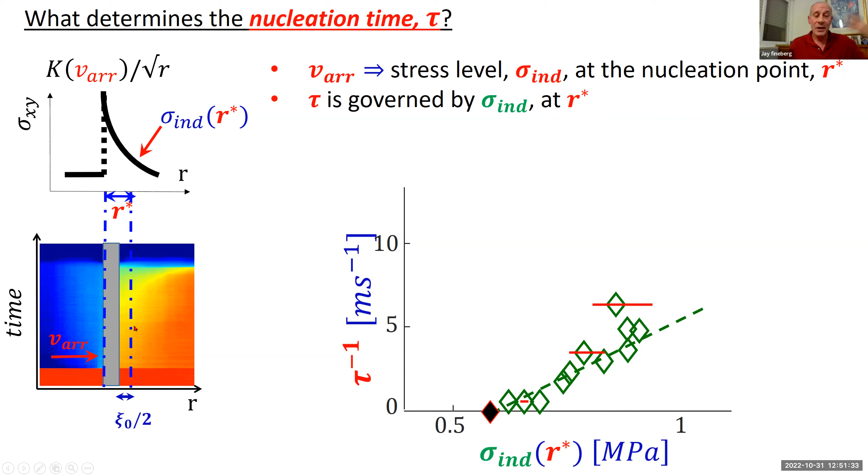For a given run of experiments, say 10 runs at different initial arrest velocities, we induce different values of the stress at the point of nucleation. We find that 1 over the nucleation time is more or less linear with the stress we measure at the point of nucleation.

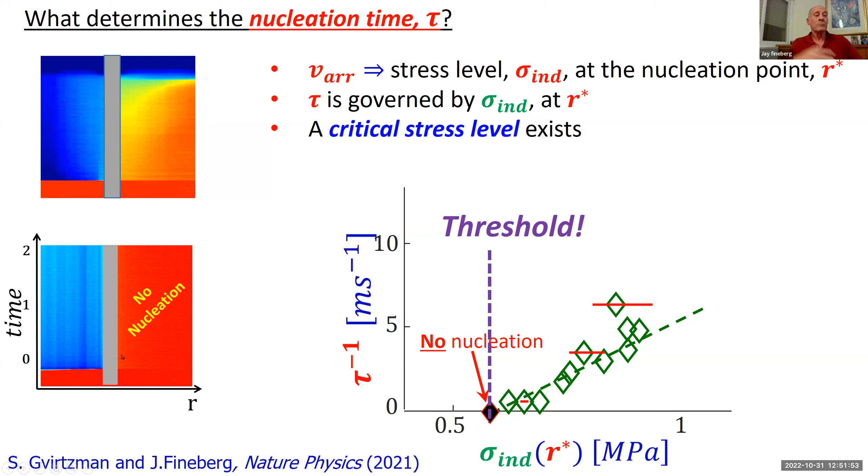We also find that there's a threshold stress. Below some critical value, which depends on where the nucleation takes place, we won't see any nucleation at all. The crack, as shown in this example, will just sit there.

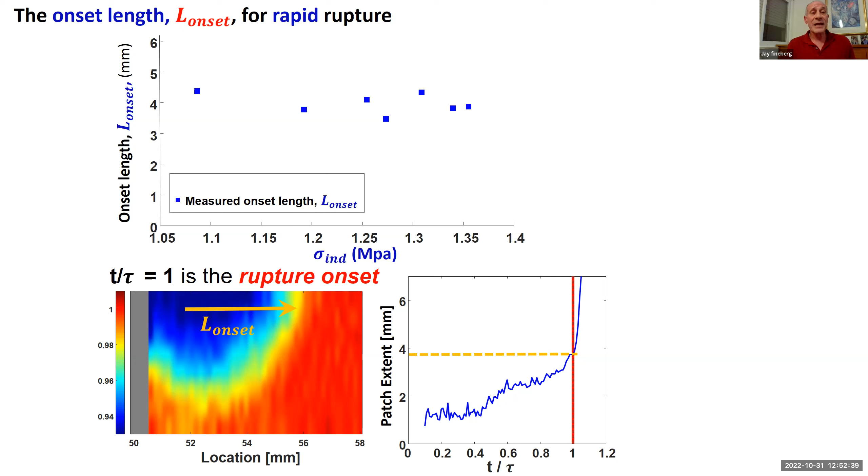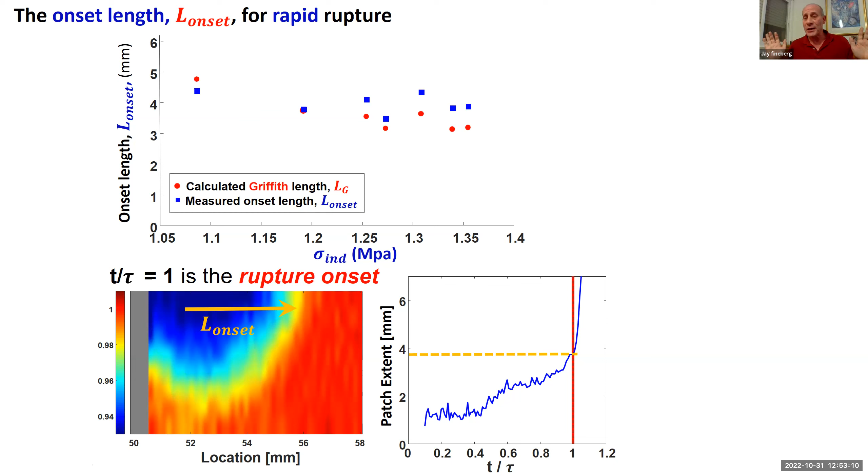What's interesting is at this point we can compare the length of the initial crack to the Griffith length, the length that fracture mechanics tells us a crack should accelerate or lose stability - these are the red points here. We find that when this patch gets to the Griffith length, fracture mechanics takes over, and everything I've told you until now takes place.

What's interesting is that this Griffith length is orders of magnitude smaller than predictions, for example, of the critical nucleation size using theories like Uenishi and Rice, and certainly rate and state predictions for these materials. Rate and state would tell us it's on the order of hundreds, if not 1,000 millimeters, and here we see 4 or 5 millimeters. So this is a very different scale than typical nucleation scales in the literature.

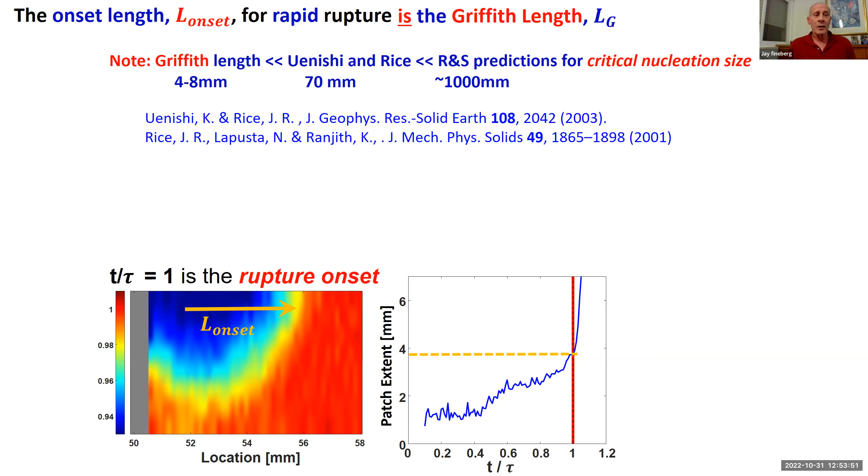I'm almost finished now, so I'm going to go through.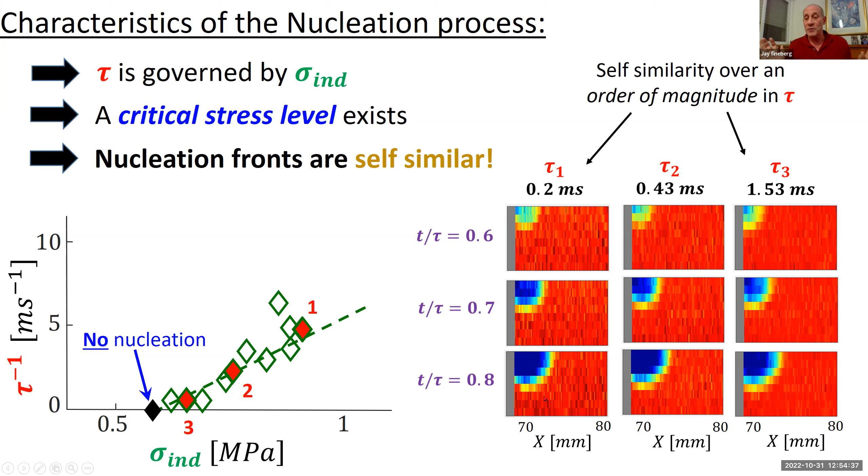I can go to a point here - in fact I will, three different points. If I normalize the contact area measurements by this critical time for rupture to start, I find that all of these rupture patches behave in a self-similar way. I see the same thing in all of these experiments, once I normalize the times by the time it takes to rupture.

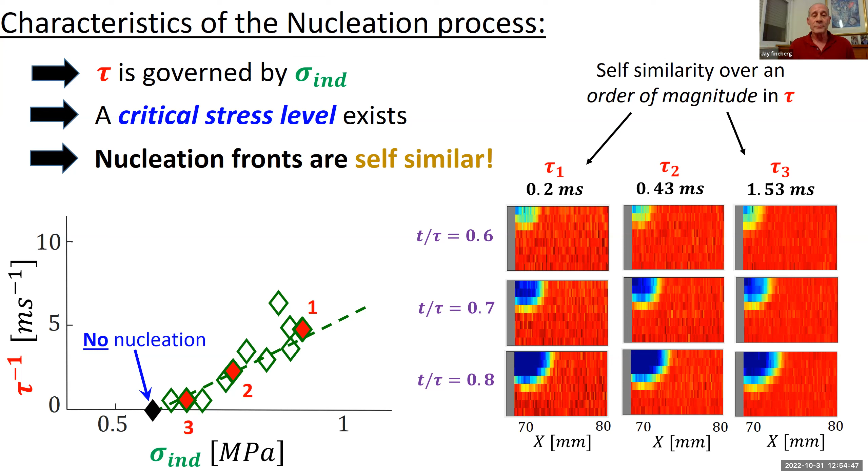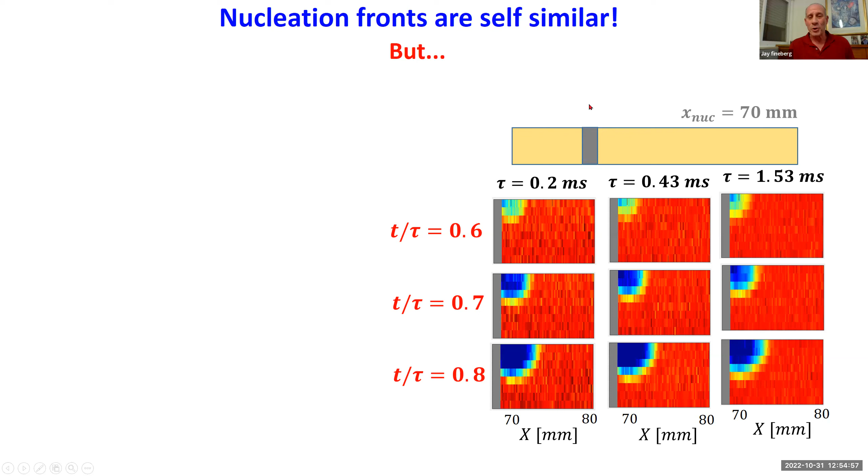Now, is there anything very deep in how these patches look? Not really. These are for, say, the magic marker placed at 70 millimeters. If we place it at 100 millimeters, we see the same self-similarity, but the patches look different because the local topography is different depending on where I stuck the marker.

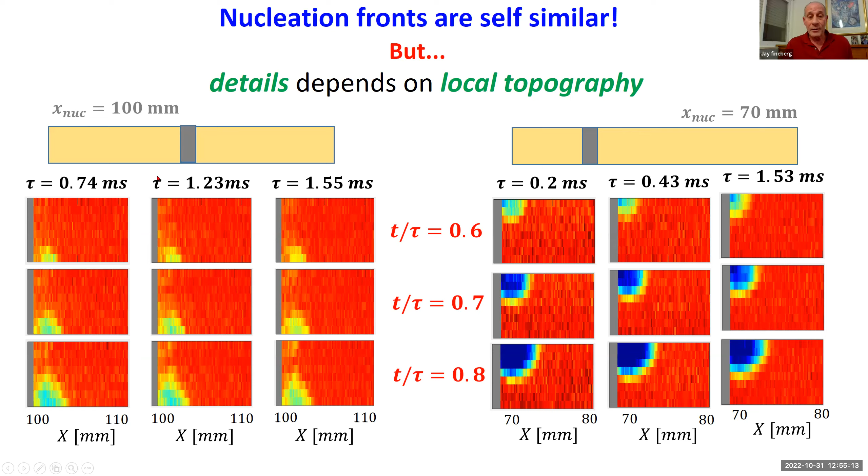Do I have like 5 minutes, Chris? Yeah, for sure. Okay, great.

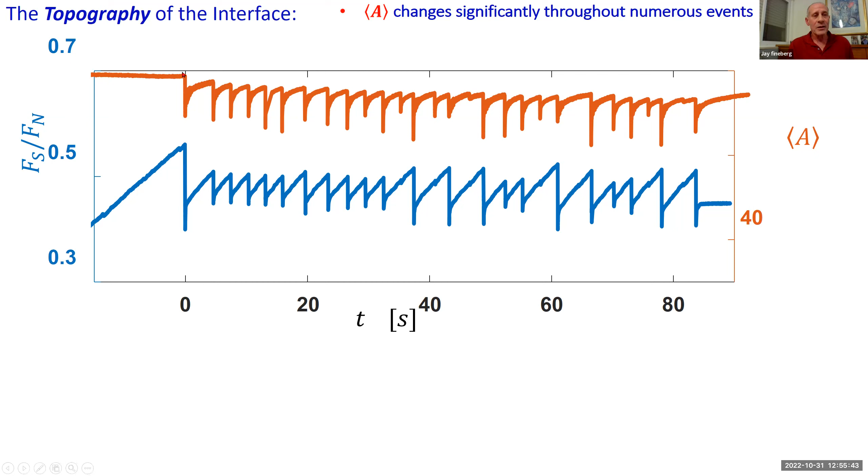So this is a stick slip sequence. In blue is the same kind of stress variations or force variations I showed you earlier. At the same time I'm looking at the mean area of contact along the patch we're looking at, and you can see it goes down, it goes up, and all that.

Why I'm showing you this: the topography - now I'm looking at the contact area, but not normalizing it by anything - even though I'm looking at 30 earthquakes taking place between this event and this event, the topography doesn't change. I have a rupture front at this location, and it doesn't erase the contacts, the contact profile that I'm seeing.

Basically, if I have a tough spot, a high ridge like shown here, that ridge is going to stay even though I have a lot of ruptures going over it. And if I have a low spot, the same. Now sometimes, some things do disappear - small features - and these small features could actually change a lot of the dynamics.

Okay, let me stop here. I see we have a question. Katerina.

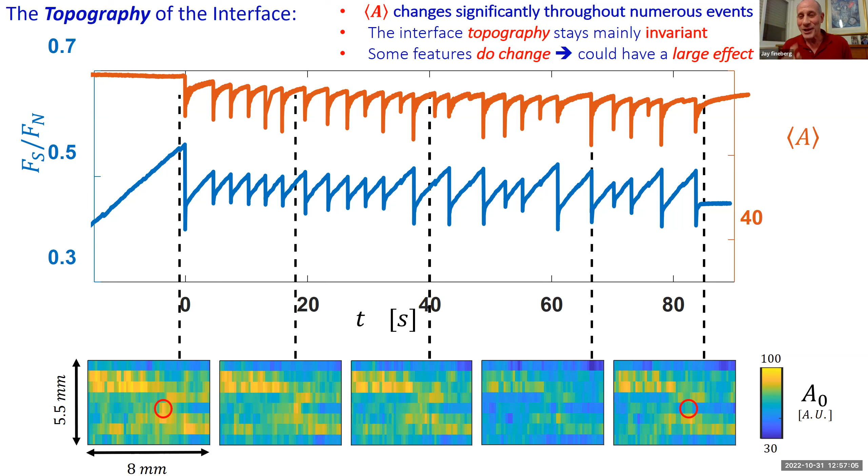Yes, Jay, so it looks like you consistently get nucleation a little bit off of where your marker line is, not right at the stress concentration. Why is that? Wonderful question. The definition of a wonderful question is I'm going to answer it in the next slide, so hold on for just one moment.

So the question is where these ruptures nucleate. This is the normalized contact area that I was showing you, and we see the patches in various movies. This is the non-normalized contact area, and this is the answer: locally we have a weak spot, and that's where the nucleation takes place. Now why this weak spot and not this one? Because this weak spot is closer to the stress singularity here, so I have higher stresses at this location than at this location. That's why it will take place there.

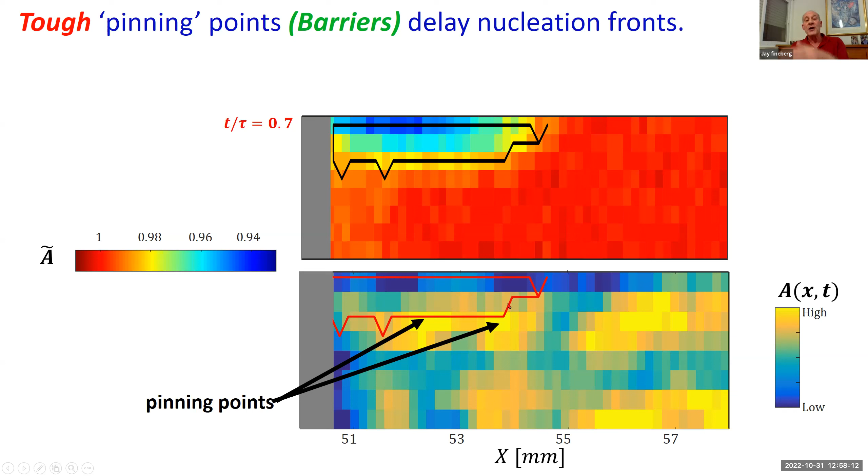Now, if I follow the nucleation patch, it will follow the topography of the ridges and the cold and hot spots of the region. As you can see, this is nucleating and being guided by this ridge of high fracture energy barriers until it gets through the barrier, and then it expands rapidly until it explodes. So did that answer your question? Yes, thank you. Okay, thank you for the question.

Now you might ask, why here rather than here? I have no idea. Sometimes we do get, often actually, nucleation at two patches. I'm showing you the simplest case where there's just one weakest spot, apparently weaker than these other spots.

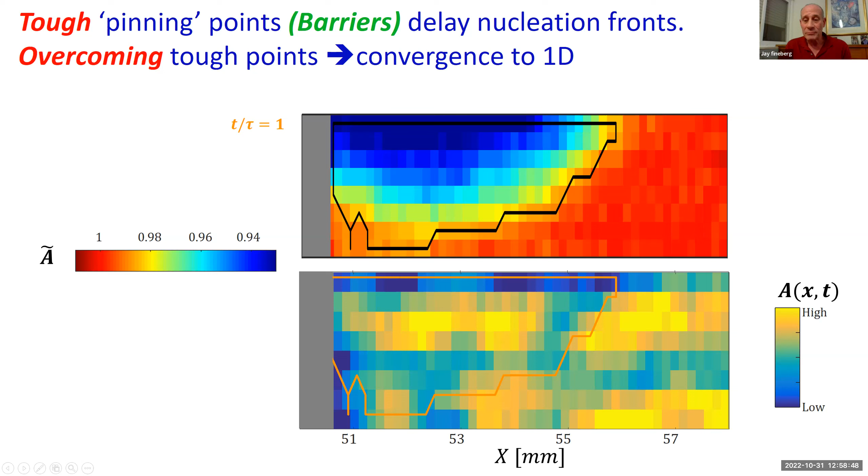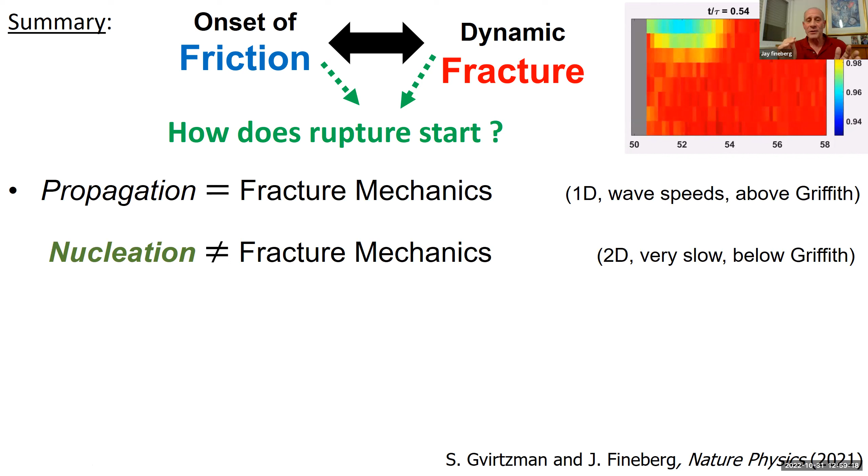Okay, so now just to summarize. I've shown you that the onset of friction in our experiments is basically dynamic rupture. Then we ask the question, how does the rupture start? We've shown that once it propagates, fracture mechanics is relevant. When it's nucleating, actually, this is not standard fracture mechanics. Why? Because there's no acceleration, even though the patch is expanding, and it's very, very slow.

Right now we're in the process of trying to find an explanation for this. I'll share it with you, I guess in another year or so when we finally decide what we think is happening. But it's not standard fracture mechanics. Standard fracture mechanics, as a crack gets larger, the energy flux or the stress intensity factor at its tip will increase with its size, so we should see rapid acceleration. Here we're always seeing very slow propagation, more or less constant, steady propagation.

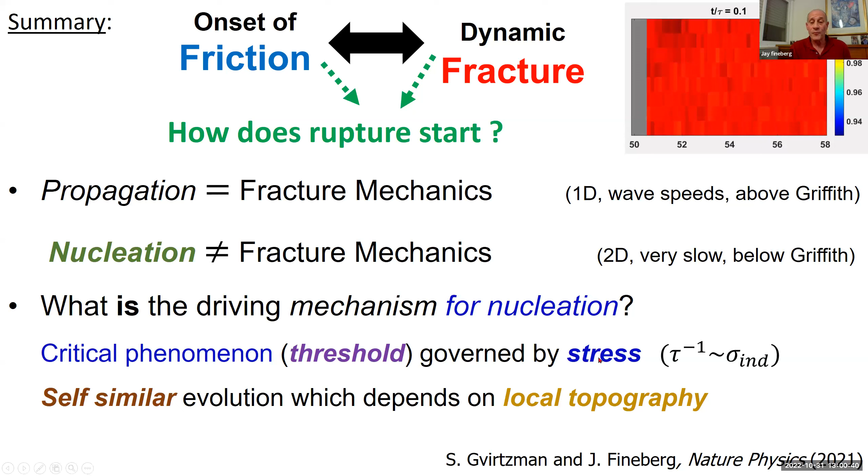So we're in the middle of looking at what is the driving mechanism for this nucleation. It is a critical phenomenon. There's a critical stress beyond which the time that it takes for this nucleation to go is proportional, or the inverse time is proportional to the stress at the location. I've just shown you a quick example that the evolution details depend on the local topography, but all of these different locations actually have the same overall formalism here. This is the same qualitative description.

So I guess a bunch of take-home messages. One thing I've told many times, probably most of you are tired of hearing me say it: friction is fracture, at least to some extent. We have real honest-to-God shear cracks that propagate within frictional interfaces. Now there are some caveats that Jean-Francois can tell you. He and Eran Bouchbinder have shown under what circumstances we would expect shear cracks to happen. But basically, as long as the residual stress is more or less constant and behaves well, we would expect dynamic fracture, fracture mechanics, to be relevant.

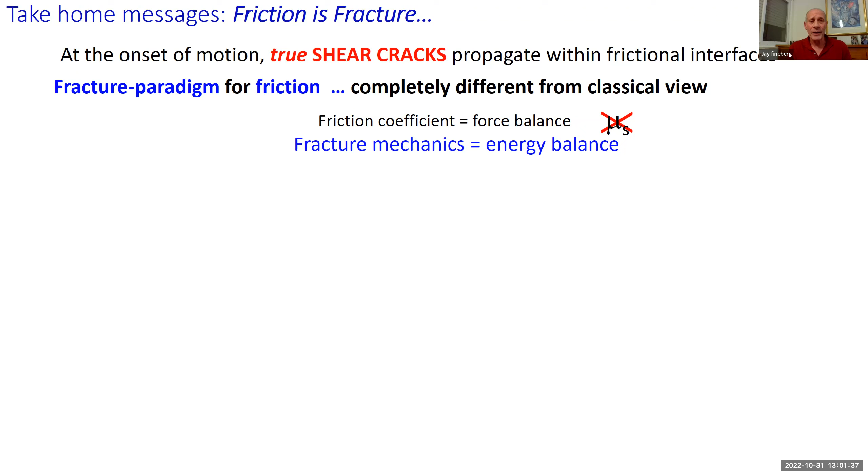This paradigm for friction is very different from the classical view. Instead of a force balance that's inherent in a friction coefficient, fracture mechanics is telling you it's basically an energy balance. Very different, but I won't go into it because we went into it enough anyway.

And nucleation fronts, if we understand them—well, even if we don't understand them—they replace the idea or the concept of a static friction coefficient, because they provide the initial crack that, when it gets long enough, fracture mechanics takes over. So this is the way that we go from zero crack to some initial crack. It's a new entity that's not described by standard fracture mechanics.

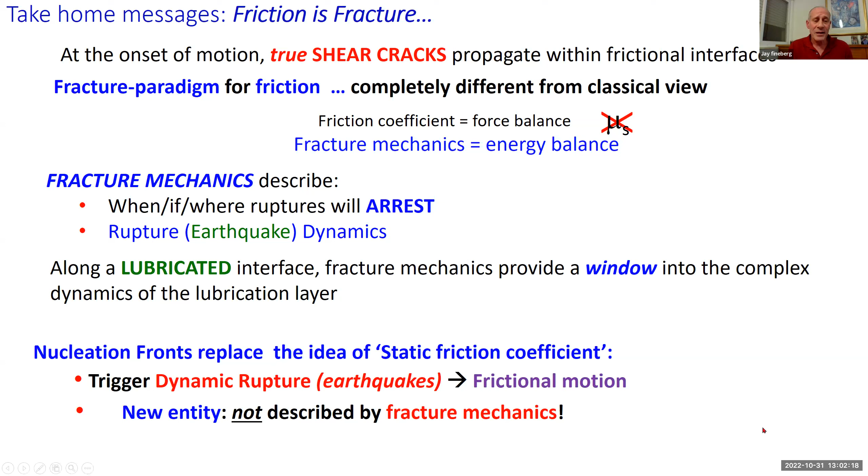And that's all I have to sell. I hope I didn't waste too much time, but thank you for your attention.

Fabulous, Jay. Please unmute and join us, me, and thanking Jay for a fabulous talk. Good.